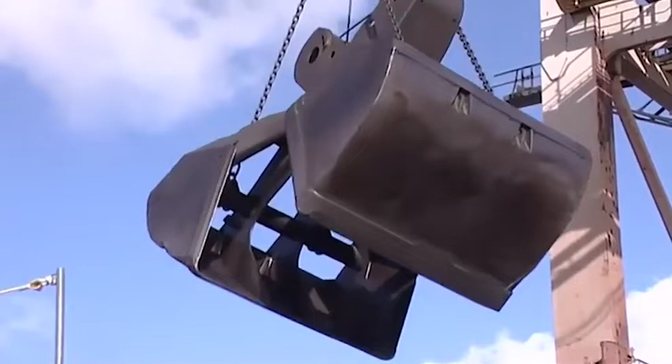As the worldwide demand for raw materials grows, faster turnarounds and an increase in terminal throughput have become commonplace. More than ever, seafarers working aboard bulk carriers need to rely on their training and professionalism in order to deal with these pressures whilst remaining safe when working.

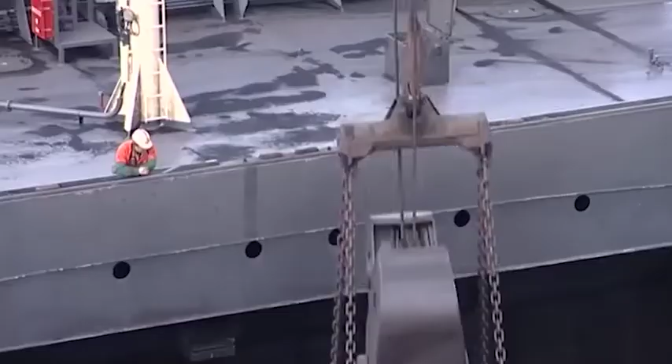Before any crew member starts working on a vessel, they'll undergo a familiarization program to become aware of the working practices and safety procedures.

Safety, however, does not stop there. The sheer size of a large bulk carrier can give the impression of great strength, but that strength can be severely weakened by unseen forces—forces powerful enough to endanger the ship and its crew. So safety aboard a bulk carrier also depends on an understanding of the vessel itself and the effect that these forces have on the ship's structure.

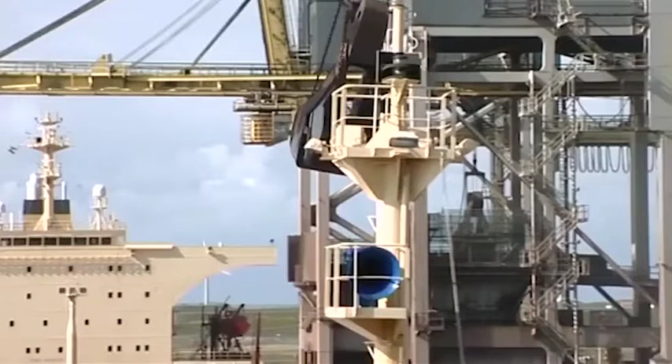And if the vessel is handled with care, then the vessel will care for its crew.

During the 80s and 90s, there were a considerable number of bulk carrier losses. In some instances, there was enough time for the crew to abandon ship, but in many cases, vessels sank with little or no warning. A number of these losses were attributed to structural damage, leading to catastrophic failure.

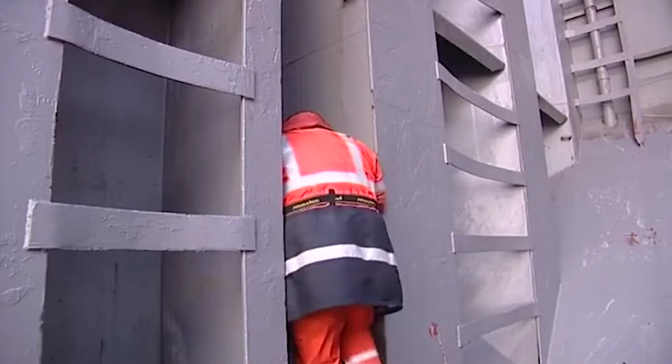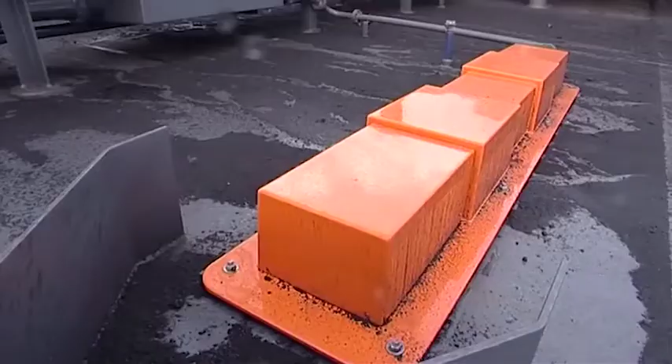After these incidents, both the International Maritime Organization and the International Association of Classification Societies carried out major research into many of the known and suspected structural failures among bulk carriers. The knowledge gained has led to ongoing improvements in vessel construction and inspection, along with new technology that enhances operational safety.

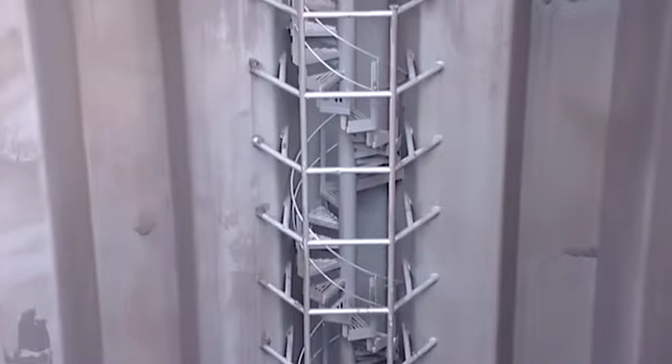For example, under the International Convention for the Safety of Life at Sea, SOLAS, a specified safe means of access for survey and inspection is now a mandatory requirement. This aids the early detection of structural defects.

And specialized training for port state control inspectors means independent inspection of a vessel's structure is more stringent than ever.

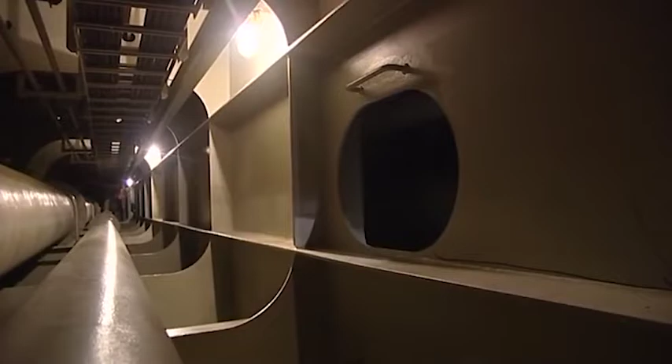The installation of high-level water alarms and monitoring systems in cargo holds, ballast tanks, and dry spaces forward of the collision bulkhead is also a mandatory requirement. High-level alarms and water ingress detection systems, commonly known as WIDS, quickly alert watchkeepers to potential flooding. These allow ship's personnel to initiate an appropriate response in good time.

Further requirements include immersion suits to be carried on all ships, and since 2006, the provision of free-fall lifeboats to be fitted on all new bulk carriers.

But despite these improvements in design, condition monitoring, and safety equipment, bulk carrier crews still need to manage and be aware of the operational risks.

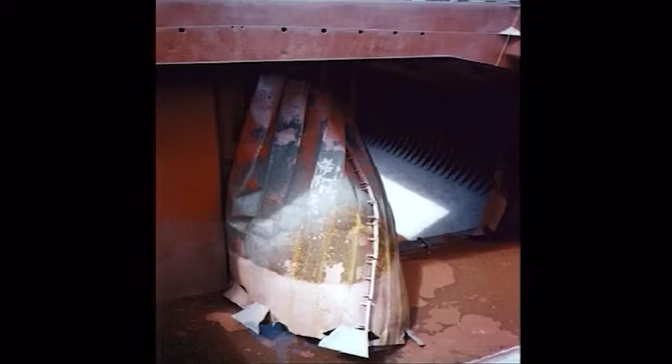Any bulk carrier can be vulnerable to catastrophic failure if not operated within its design limits, or if structural fatigue and damage is ignored.

And a ship whose structure fails can be lost in a matter of minutes, as the resulting ingress of water could quickly lead to irreversible flooding. The speed with which a bulk carrier and its cargo can sink should not be underestimated.

This highlights the necessity of water ingress detection systems. But of course, the most effective safety measure will always be the prevention of structural failure in the first place.

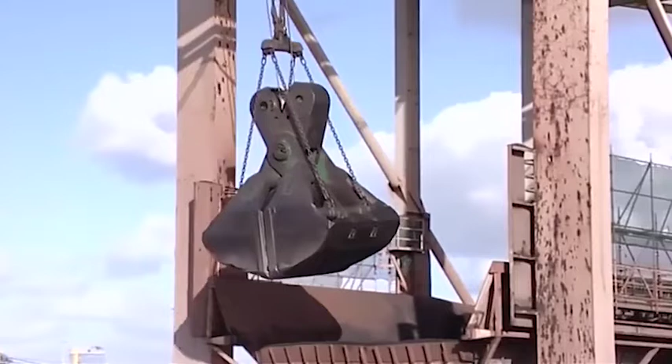The causes of structural failure, instability, or sudden water ingress are not necessarily due to poor design. In fact, the overall safety of a bulk carrier often depends on the degree of care taken by ship's crew and shore personnel during loading and discharge.

Structural failures and instability can often be triggered by three contributing factors.

Damage caused by equipment used during cargo operations.

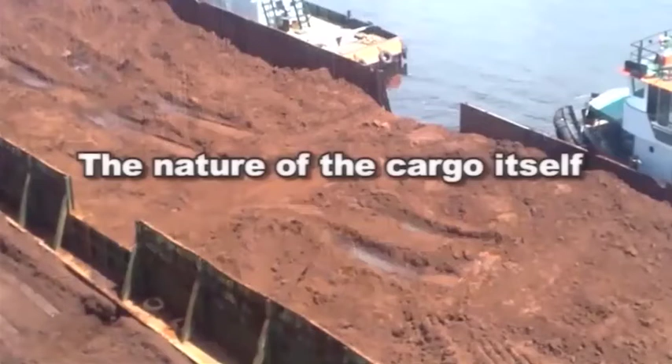The nature of the cargo itself, either causing corrosion to the hold structure or cargoes liable to shift or liquefy, leading to possible instability.

And mistakes or deviations from the agreed plan during loading and deballasting, causing stress to the ship beyond its design limits.

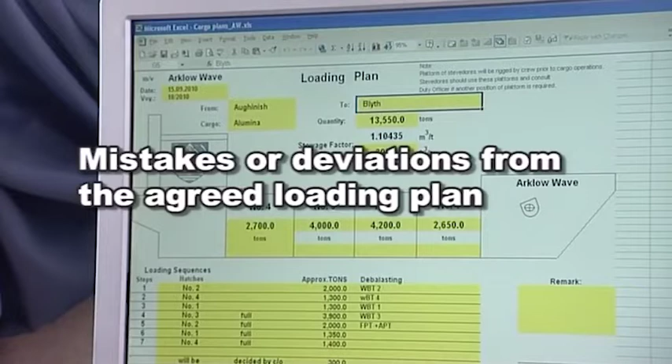Let's look at each of these points in more detail, starting with damage caused by equipment used during cargo operations.

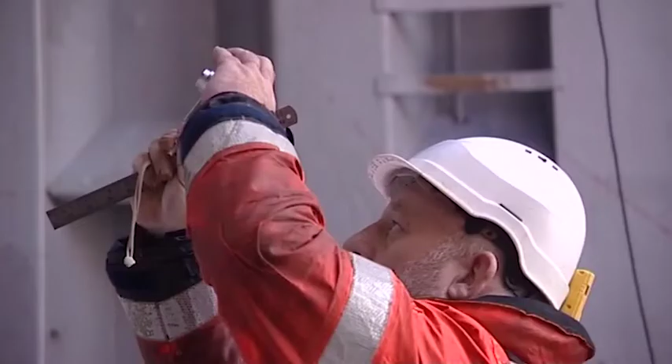Upon completion of discharge, the holds, hatch covers, and deck areas should always be inspected for any signs of damage. During discharge, the internal structures and coatings of the hold can be exposed to damage from grabs and from the hydraulic equipment often used to free and clear cargo residues.

The hold bottom and tank top plating can also sustain damage. Typically, this appears in the form of denting and can be the result of high-impact drops or pours during the loading of heavier cargoes.

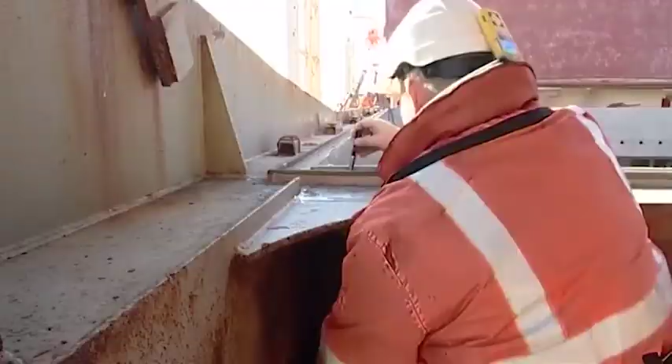On deck, the damage sustained from incidents during cargo operations can sometimes be more obvious. But the checking of coaming tops and smaller items, such as the correct functioning of hatch cover drainage channels, should not be overlooked.

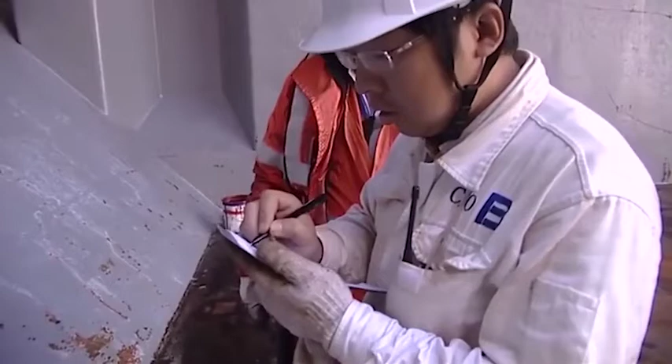Any findings should always be reported and recorded. If damage is discovered which may affect the integrity of the hull, the owners and classification society should be notified, as this could affect the vessel's insurance cover. Such incidents could also prevent a vessel from sailing until an approved repair has been made.

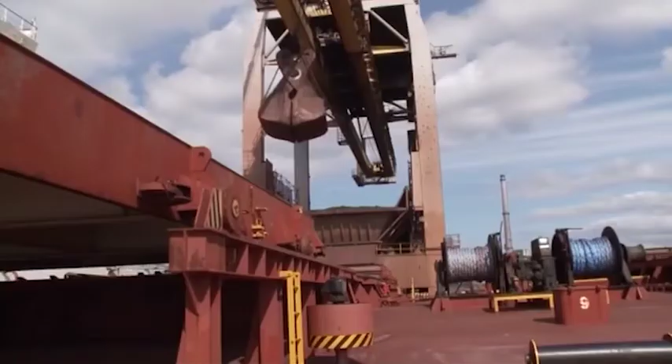Stevedore damage may contribute to a weakening of the ship's structure, but the nature of the cargo can also have a detrimental effect. For this reason, the condition of coatings and welds in the hold should also be noted.

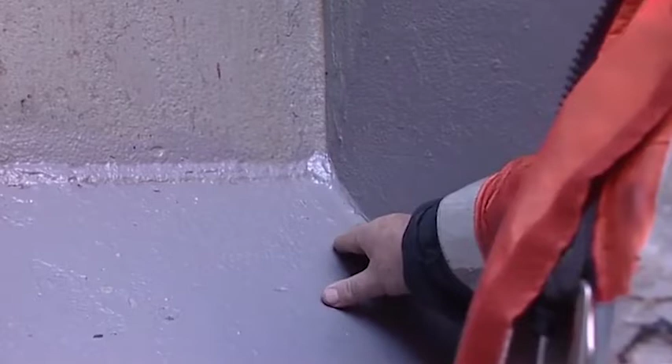Coatings are there to protect the steel from corrosion, either from the cargo itself or the environment. But many cargoes have corrosive or abrasive natures, which over time can damage this protection.

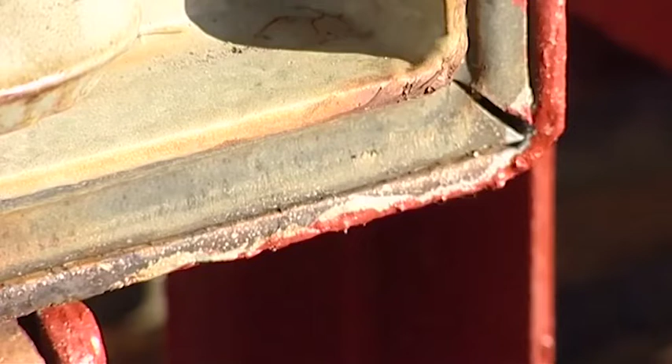The hatch covers, coamings, packing rubbers, and compression bars should always be examined for signs of corrosion or deterioration. However, other access points should also be inspected. In particular, the gaskets and securings fitted to manholes and inspection hatches should be checked to ensure they're structurally sound and weathertight.

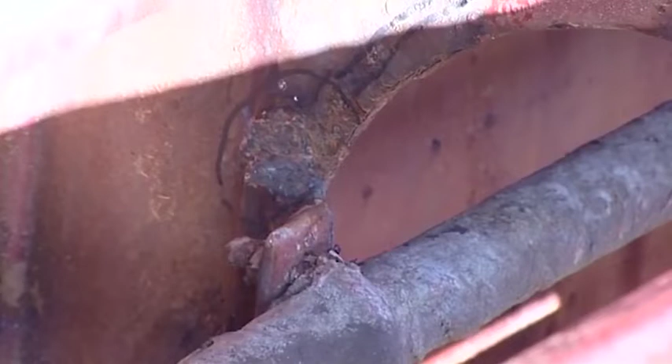Where the effect of corrosion is more severe, any wastage will need to be checked against class regulations and specified diminution limits, and repaired as necessary. Regular maintenance and the use of protective barrier coatings during the handling of certain cargoes will help to delay the long-term effects of corrosion.

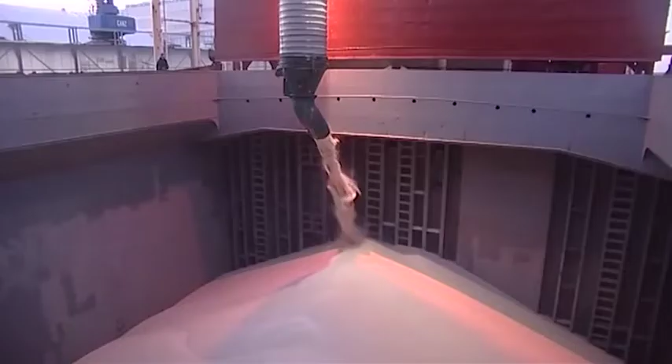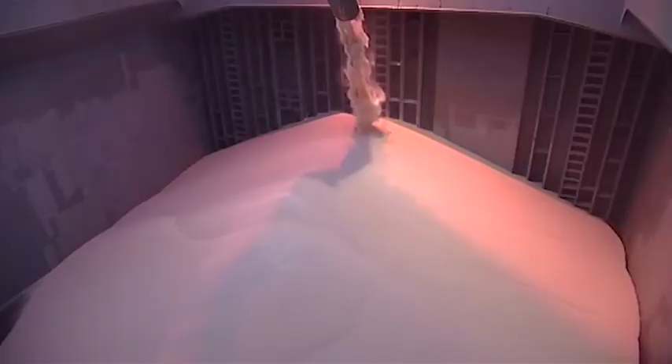But while some cargoes can cause corrosion, others have characteristics that can result in an adverse effect on stability. For example, during loading, free-flowing cargoes such as grains and fertilizers will require careful attention when trimming to reduce the risk of instability. And grain cargoes in particular are subject to national and international legislation governing stability.

But another less obvious risk affecting certain dry cargoes is liquefaction, causing the cargo to shift and the ship to become unstable. Liquefaction occurs if the moisture content of a cargo is too high. If stored in the open, for instance, a cargo could have become affected by recent weather conditions, such as rain or ice, potentially increasing the moisture content.

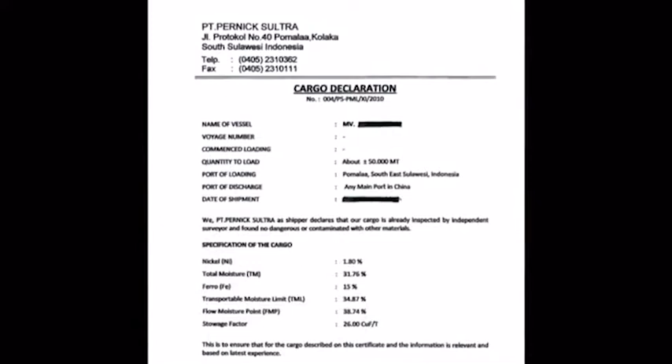Any commodity susceptible to this condition should have moisture content below the transportable moisture limit, or TML. This must be certified in the shipper's declaration, stating that the moisture content is within acceptable limits prior to loading.

Stevedore damage and the nature of the cargo may contribute to either structural failure or instability, but a further potential risk to the integrity of the ship is the consequence of mistakes made during the loading process.

The structure of a typical bulk carrier consists of a single-deck ship, fitted with topside tanks, a double bottom, hopper tanks, and side shells with vertical frames, corrugated bulkheads, and hatchways above. The holds are a series of large spaces separated by transverse bulkheads.

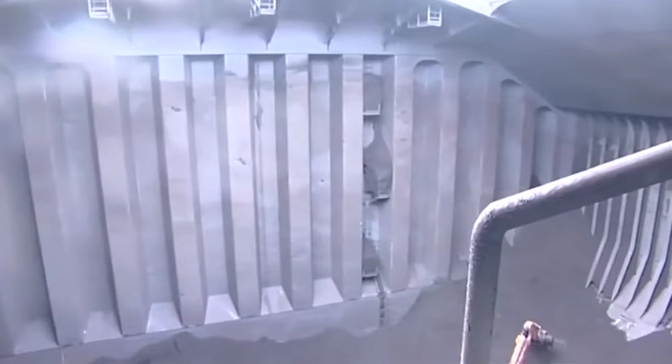Despite all this steelwork, the ship is not a rigid structure. In fact, for it to function effectively, there must be a degree of flexibility. However, overloading any one of the holds will cause excessive stress to the structure of the vessel. And if a cargo is poured into one end of a hold and piles up, the pressure acting on the transverse bulkhead will increase.

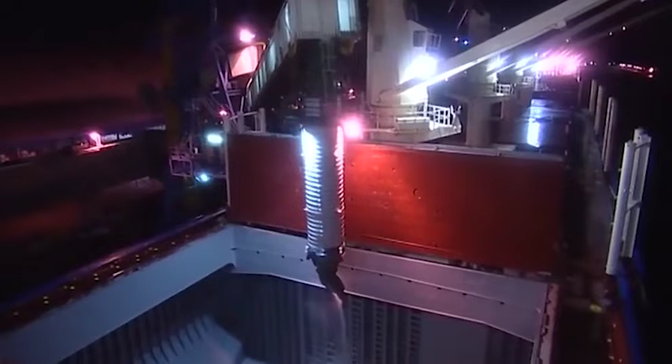Likewise, if cargo is unevenly distributed away from the vessel's center line, this will induce twisting and the subsequent warping of the hull structure, as well as placing stress on the transverse bulkheads. Therefore, the agreed loading sequence should be followed precisely, and cargo must always be stowed and trimmed appropriately within permissible limits.

Whilst at sea, there are further forces that act upon the hull, which must also be considered. A ship has its own weight, made up of its structure, machinery, crew, stores and effects. Adding to this, by filling and emptying the cargo holds and ballast tanks, will generate additional shear forces and bending moments.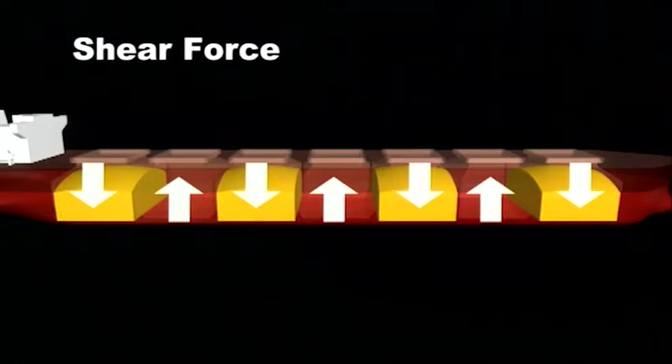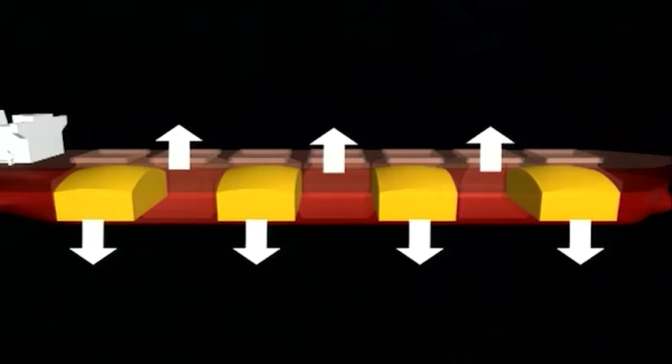Put simply, shear force is caused by two opposing forces acting against each other. There is a downward vertical force, which comes from the weight of the hull and cargo, and an opposing upward action, which is the buoyancy of the vessel. Shear forces occur when these forces are not in balance at every point along the length of the ship.

A bending moment is a force that bends the vessel along its length. If weight is concentrated in the middle of the ship, bending of the structure will cause sagging. And if weight is concentrated at opposite ends of the ship, this will result in hogging.

At sea, the ship is subjected to a continuous cycle of varying forces and changing wave pressure acting on the hull. If handled with care, the ship's structure is designed to withstand maximum permissible shear forces and bending moments.

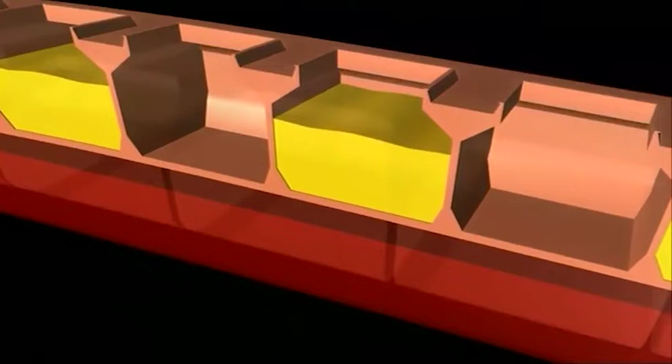Shear force and bending moment calculations should always be prepared prior to any cargo handling or ballast water operation. The calculations must be accurate, because if the maximum permissible limits are exceeded, the ship could be at risk of structural failure.

Handling a bulk carrier with care requires understanding and the full cooperation and expertise of both ship's crew and shore personnel. Both parties have a number of tools at their disposal, which assist with the correct loading, stowage, and discharge of cargo.

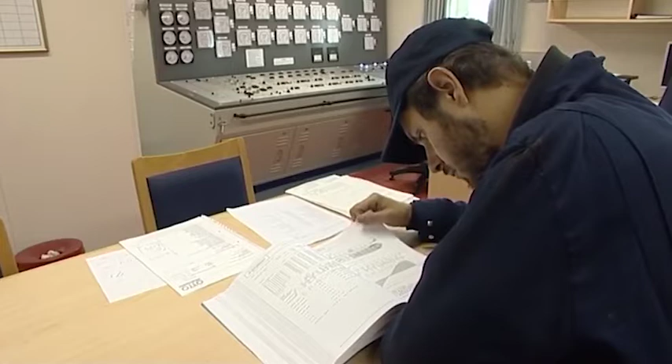Aboard ship, there should be an approved loading manual. This must give the ship's designed cargo loading conditions and distribution, as well as stating the maximum permissible shear force and bending moment limits. These limits are set for both harbour conditions, when the vessel is in port, and at sea conditions, which take into account the additional stresses of the ship moving in a seaway.

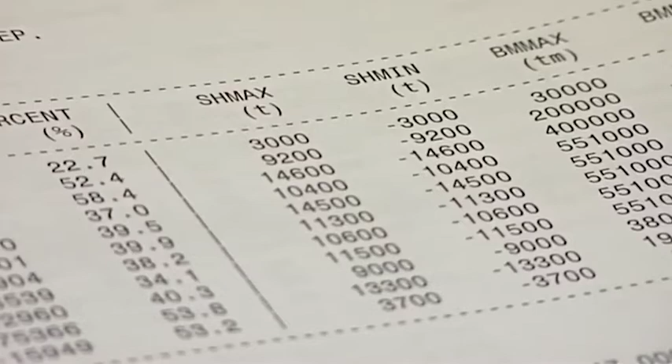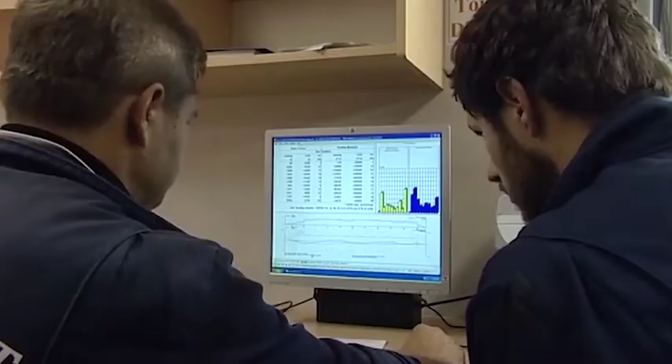The ship should also be equipped with a designated class-approved loading computer and appropriate software. As these systems vary, ship's officers must be familiar with and competent in the use of the equipment specific to the vessel.

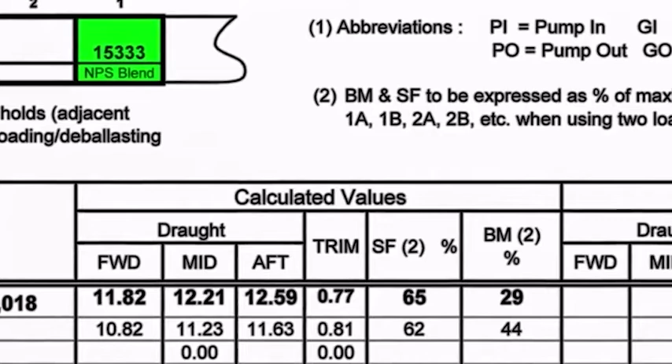Ship's officers also need to be capable of producing an accurate loading or discharge plan. This must take into account ballast water management and stability, as well as the vessel's shear force and bending moments at each stage of any loading or discharge sequence. The calculations must observe the permissible harbour and at sea limits.

And if plans deviate for whatever reason, the figures must be recalculated before acceptance. Aboard some vessels, hull stress monitoring systems are fitted.

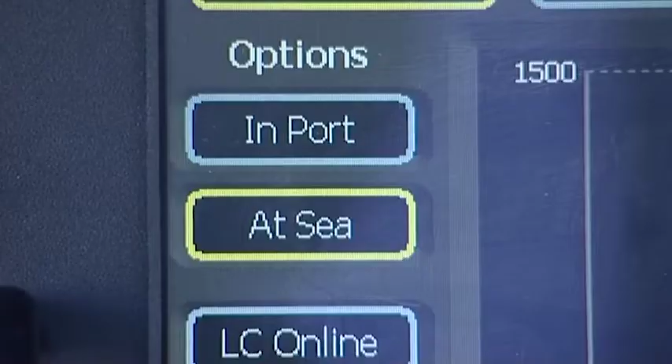These can provide ship's officers with real-time indications of the effects of shear force and bending moments, both at sea and in port. As they're often linked to the loading computer, they can highlight any deviations from the loading plan or the maximum permitted stress limits, allowing corrective action to be taken.

There are also mandatory regulations and guidance in the form of two codebooks, which must be aboard every bulk carrier. The International Maritime Solid Bulk Cargoes Code, the IMSBC code, is designed to help ship's crew identify and correctly handle certain cargoes that could present a hazard, such as liquefaction or chemical reaction.

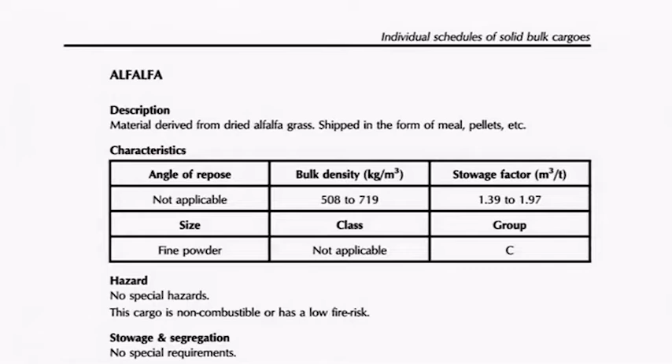The individual schedules not only describe the particular characteristics of these cargoes, they also provide general reference information relating to bulk densities, stowage factors, and trimming procedures.

The Code of Practice for the Safe Loading and Unloading of Bulk Carriers, or Blue Code, is found in the supplement section of the IMSBC Code. The Blue Code provides guidance to ship's masters and terminal operators on the safe handling, loading, and unloading of solid bulk cargoes.

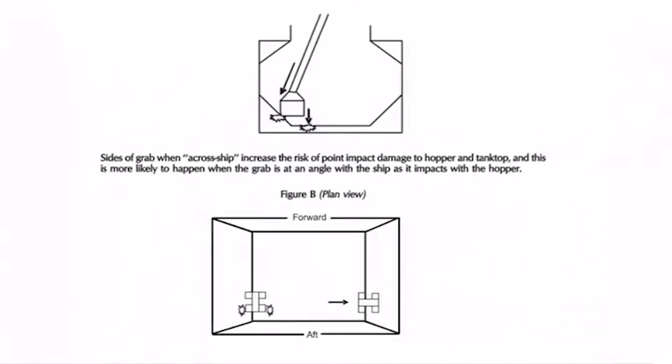Ashore, the Blue Manual supplements the Blue Code and provides further detailed guidance for terminal operators. By referring to these codes, and by understanding bulk carrier design and operating limits, both the ship's crew and shore personnel become key partners for the safety of the vessel. And as with any successful partnership, establishing good, clear communication early in the relationship is vital.

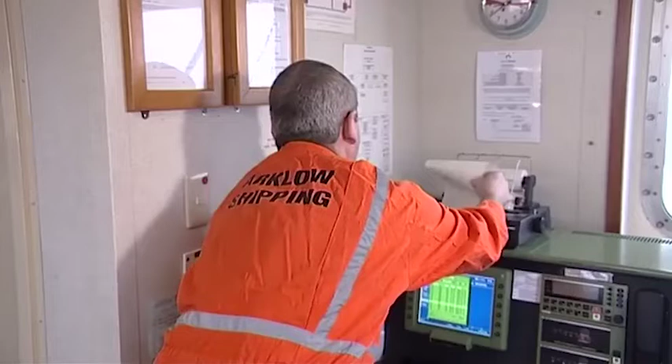Once a charter or commercial voyage has been fixed, it's important that the ship is provided with preliminary information about the prospective cargo and terminal, so that loading or unloading can be planned.

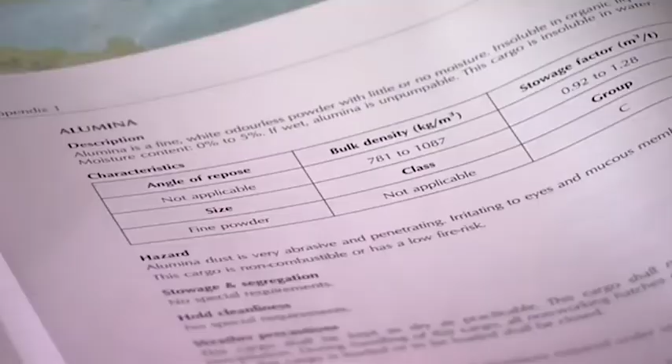If applicable, this information will be checked against the IMSBC code, so that ship's officers are fully aware of the properties or handling requirements of the intended cargo. The loading plan should also take into account the requirements of the IMSBC code, as this may have a bearing on stowage and segregation.

But in all cases, the preliminary shipping information must be received in sufficient time to allow an accurate loading or discharge plan to be produced. Likewise, terminal staff will require information about the ship in order for them to put in place their own preparations for cargo handling.

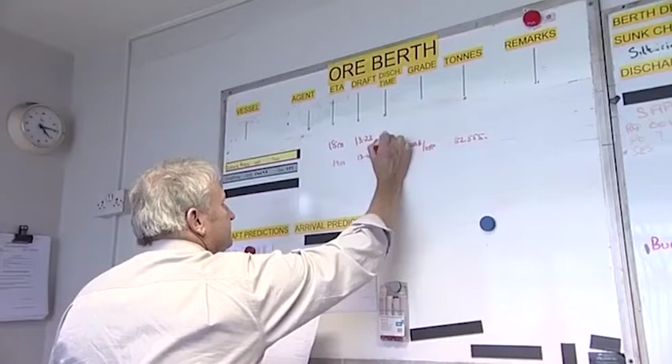Therefore, a two-way information exchange between ship and shore must take place prior to arrival. This is to ensure the upcoming cargo operations are conducted safely and within the operational limits of both vessel and terminal.

This information exchange should be laid out as specified by the Blue Code and must be clear, understood, and agreed by both parties. As early as possible, the master should provide the ship's ETA and particulars, details of any ballasting or deballasting requirements, along with a preliminary loading or discharge plan.

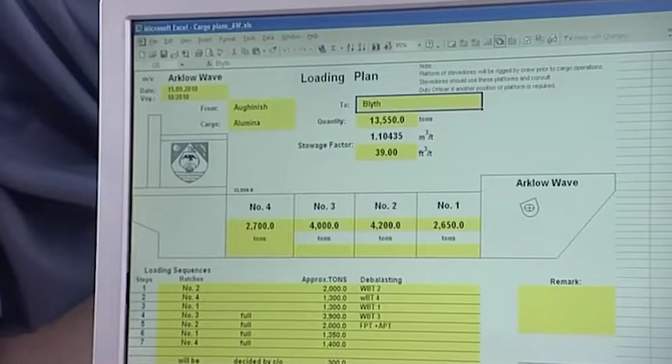This plan should be prepared in a form such as that laid out in Appendix 2 of the Blue Code. Amongst other items, it should include the quantity of cargo and the number and order in which holds are to be worked.

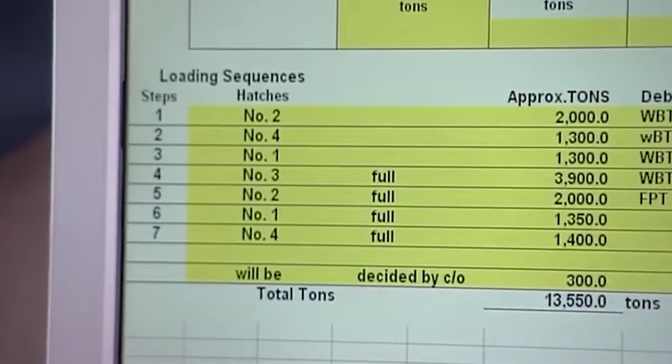The ship should also provide details of its mooring and gangway arrangements, as well as confirming that holds into which cargo is to be loaded are clean and free from previous cargo residues.

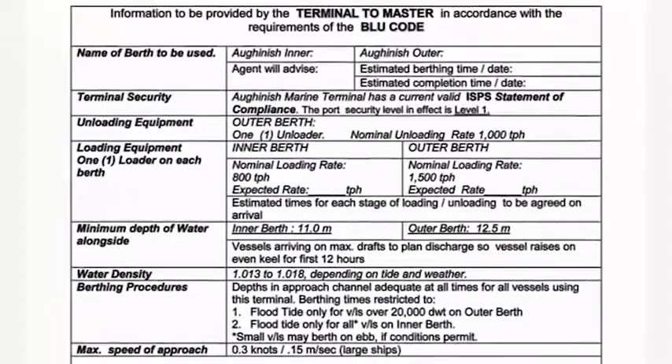For its part, the terminal should provide information such as the name and availability of the berth, the estimated times for berthing, the estimated times for the completion of loading or discharge, any characteristics of the cargo handling equipment, expected loading or unloading rates, and the name and contact details of the nominated terminal representative.

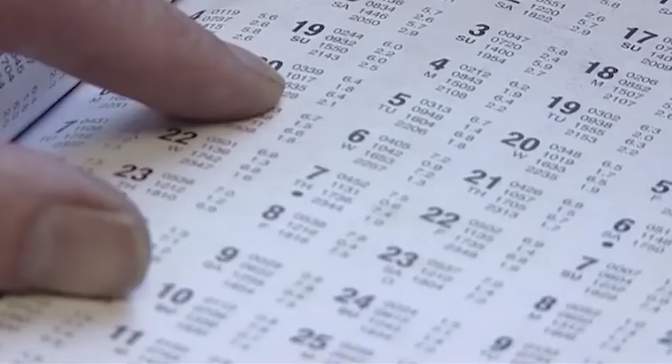Further factors to consider are the minimum depth of water alongside, berthing arrangements, and the availability of tugs. Any information given by the terminal relating to tides, the water depth at the approach and departure channels, as well as the water depth at the berth, must be accurate and complete to assist safe navigation.

The ship's arrival condition and maneuverability should always be considered. For example, a lightly ballasted ship can become vulnerable during navigation, as both rudder and propeller efficiencies are reduced, and the windage is increased. In these circumstances, the ship's ability to maneuver safely is reduced, particularly in high winds and strong currents. And with restricted vessel handling, the chances of navigational error, collision, or grounding increase.

It's vital that any proposed arrival or departure drafts, as well as any restrictions or time requirements relating to deballasting operations, are checked and agreed by both parties. Any conditions applied must always take into account the capabilities and safe working limits of both the ship and terminal.

We have 15.5 meters, okay? Depth. Yeah.

Once alongside, the terminal's nominated representative and the master, or chief officer, must conduct a meeting before starting cargo operations. At this point, the final cargo plan is discussed and approved, and a joint ship-shore checklist completed and countersigned by both parties.

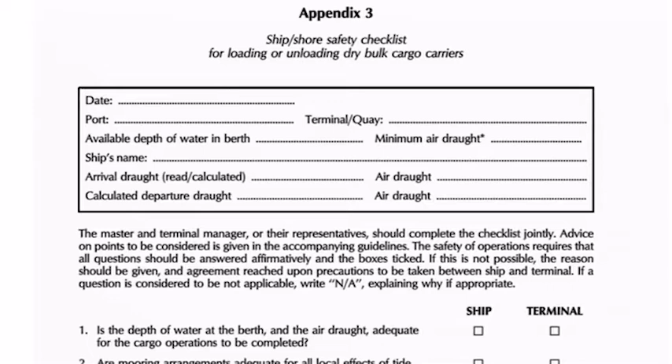Amongst other items, this checklist will consider that an agreed system of communication along with designated liaison contacts aboard and ashore has been established. Any restrictions on taking bunkers have been put in place, and that the atmosphere is safe in the holds that may require access.

Check, too, that the shipper has provided the information on the properties of the cargo, and that any testing certification relating to cargo characteristics is complete and accurate.

Masters are ultimately responsible at all times for the safe loading and unloading of the ship. This includes controlling the safe and efficient synchronization of cargo operations and ballast water operations.

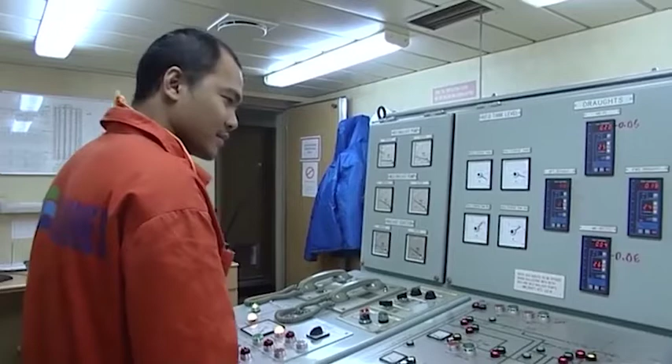Both the terminal and ship should ensure the sequence of holds to be worked has been clearly identified and agreed, with a maximum rate of 1,000 per hour.

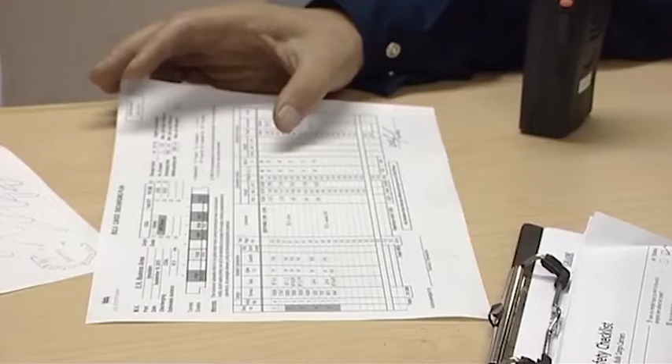The ship must ensure the cargo loading or discharge plan has been calculated for all stages of the operation, including at times of ballasting or deballasting. For this reason, it's imperative that the loading or discharge plan has been agreed and countersigned by both the ship and the terminal, and that communication and agreement is maintained at all times.

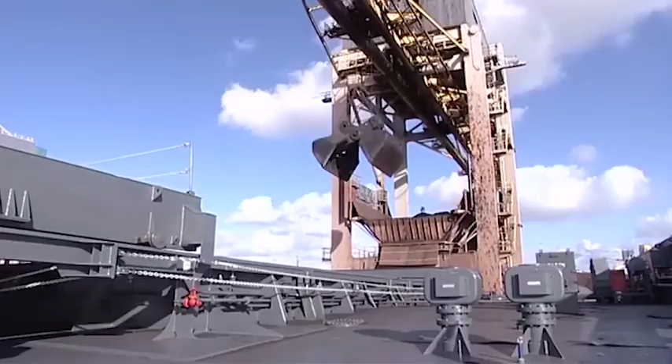If ship's officers are not satisfied with the cargo handling activity, or there is a sudden deviation from the agreed plan, the master should be informed immediately.

By that time we already need to sail out, so they're asking is that okay for us.

The master must stop the loading or discharge if the cargo distribution could adversely affect either the stability or the stresses on the ship's structure.

Cargo distribution along the ship's length has a direct influence on the bending moments and shear forces. Evenly distributed cargo in all holds is usually adopted for low-density cargoes, such as coal and grain. This is called homogeneous loading.

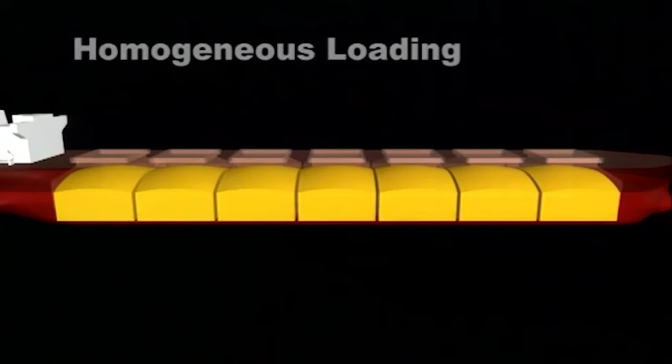Large bulk carriers sometimes stow high-density cargoes, such as mineral ores, in every other hold. This is called alternate loading.

When high-density cargoes are stowed in this manner, the weight of the cargo in each hold is approximately double that carried in a homogeneous load distribution. As a result, this requires a vessel to be strengthened and classified for this loading configuration. Under SOLAS, vessels over 150 meters and more than 10 years old are forbidden to use alternate loading unless certain conditions are met.

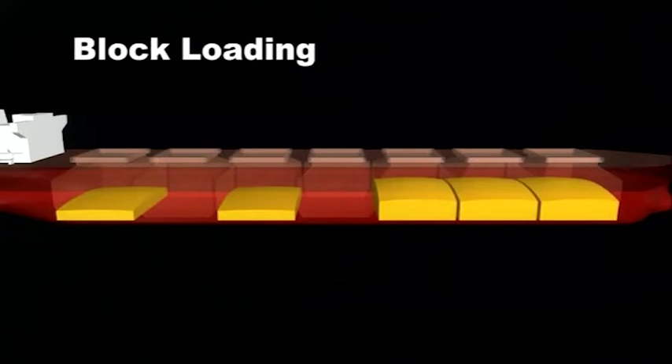Block loading is where cargo is loaded in two or more adjacent holds, with neighboring holds remaining empty. This method is often adopted when the ship is part loaded or carrying more than one commodity.

It requires approved conditions as specified in the loading manual. And to avoid overstressing the hull structure, careful consideration should be given to the amount of cargo loaded in each hold and to the sailing draft.

Regardless of loading method, at all times the hull stresses should be kept below permissible limits. Loading rates and deballasting rates must be monitored throughout to ensure that the ship's structure is not overstressed and that shear force and bending moment limits are not exceeded.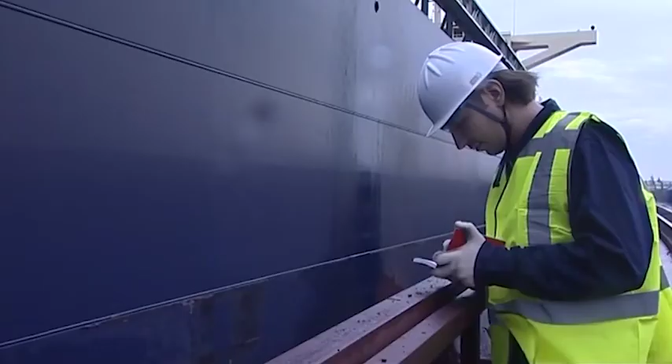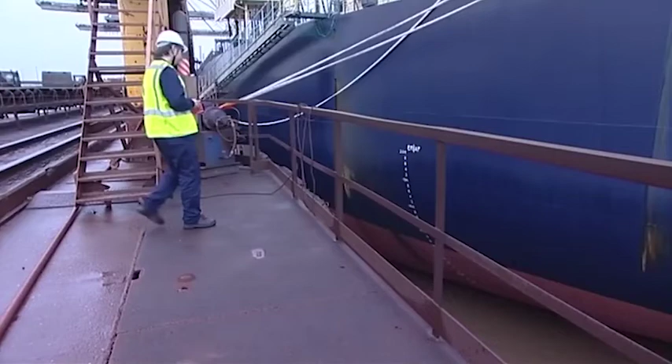It's crucial, therefore, to monitor the ship's condition closely during cargo operations. Ship's personnel must carry out draft surveys at regular intervals to check the calculated ship's loading condition, the cargo weight, and its distribution. The recorded readings should be checked against the loading plan. This information, together with loading rates, ballast synchronization, stress and displacement calculations, all help to balance the forces acting on the hull.

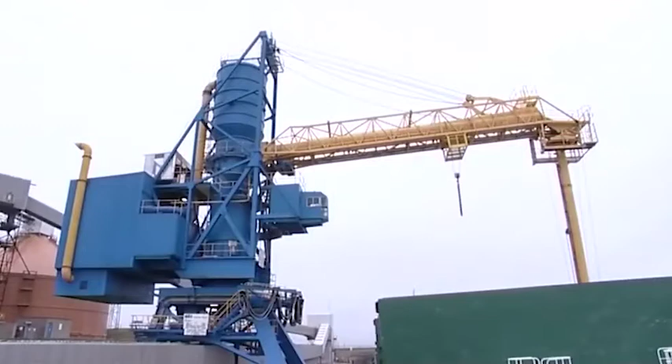Officers on watch during cargo operations must ensure terminal staff follow the agreed plan. If there is any deviation for whatever reason, corrective action should be taken. If necessary, cargo operations should be stopped and the plan modified, ensuring that the stress and operational limits of the ship are not exceeded.

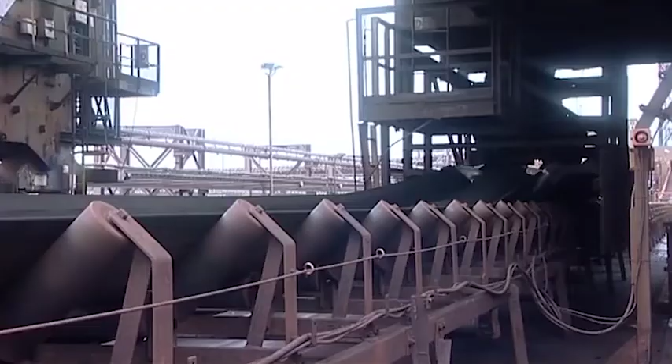For example, conveyor belts offer a very efficient method of loading, with rates varying between 1,000 and 16,000 tons per hour, and in some ports, rates can even go higher. This stretches the efficiency of the ship's ballast water system, making the synchronization between deballasting and loading difficult.

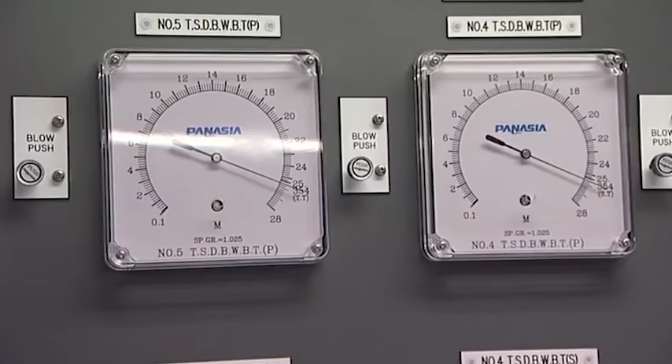In these circumstances, the ship and the terminal should agree that if deballasting becomes out of step with cargo operations, loading should be suspended until the deballasting operation has caught up.

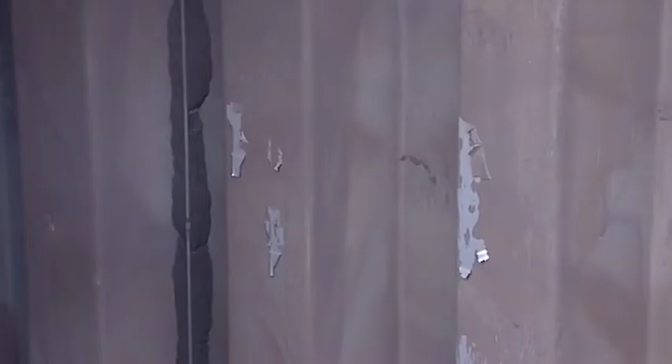During both loading and discharge, mechanical equipment may also damage the ship's structure. Whilst discharging, the use of grabs or hydraulic excavators can cause damage to the hold structure or its protective coatings. And during loading, it is the terminal's responsibility to alert the master to any individual grab loads or pours that are large or heavy, where there could be the risk of a high-impact drop.

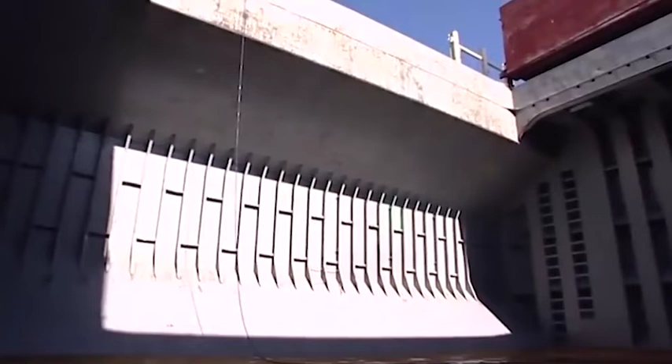These could potentially damage hopper sides and tank top structures, or stress the ship's hull. For this reason, particular care should be taken at the start of any loading operation into empty holds, especially when loading steel and scrap metal cargoes.

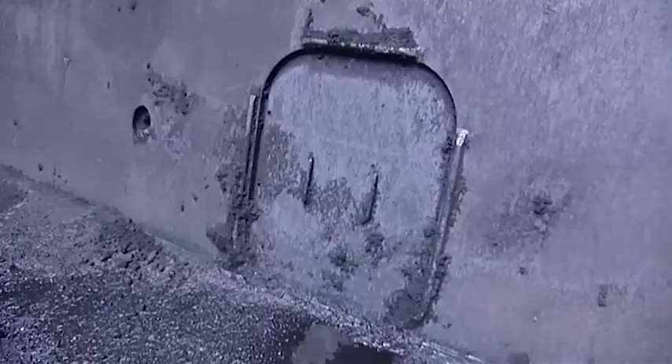Officers and crew members should be on the lookout for damage during cargo operations at all times. Manhole covers or gratings for bilge wells should be checked that they're present and intact. And any damage to the ship's structure caused by terminal handling equipment must be reported immediately. Guidance on damage reporting procedures is contained in the BLU Manual, Annex 3. But many companies will also have their own procedures.

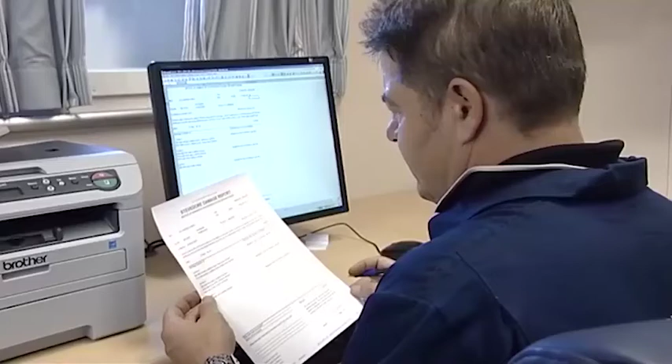Loading equipment and conveyor designs vary. The time it takes to halt the operation must be taken into account to avoid overloading the ship. During the last stages of loading, the master should advise the terminal when final trimming has to begin in order to allow time for conveyor runoff.

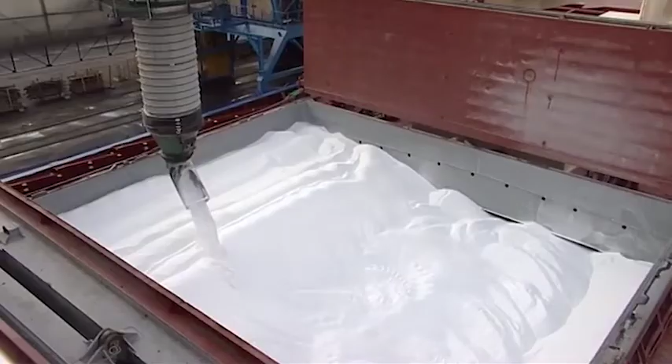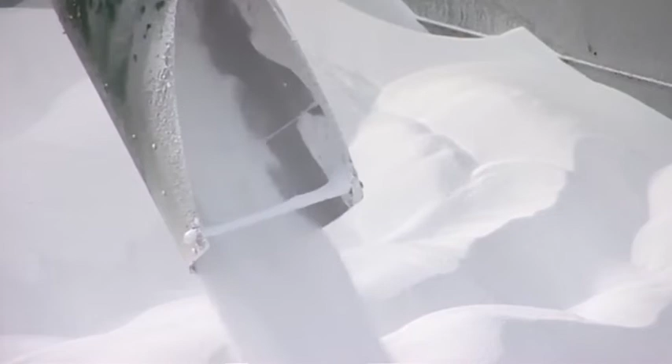Trimming requires close supervision, and where applicable, it should be carried out in accordance with the requirements of the IMSBC code. For instance, some cargoes have a specific angle of repose. This is of significance with free-flowing, non-cohesive cargoes, liable to shift if not correctly distributed.

In the case of discharge, the terminal representative should advise the master when unloading is considered as completed from each hold. And close supervision should be kept on the final stages of the unloading operation to ensure that all cargo has been discharged and holds cleaned as appropriate.

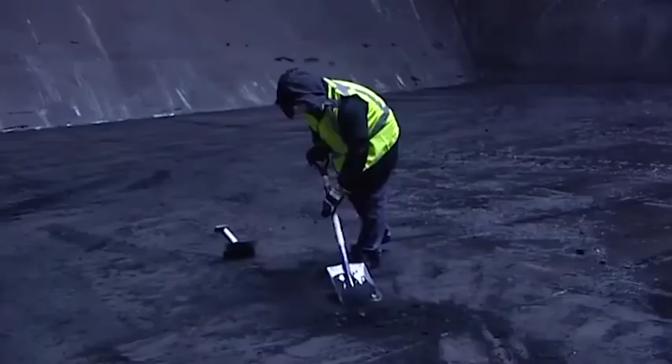On completion of any cargo operations, the master and terminal representative should agree in writing that the ship has been loaded or discharged in accordance with the plan, including any agreed variations. Any damage that has occurred should also be recorded and noted by both parties.

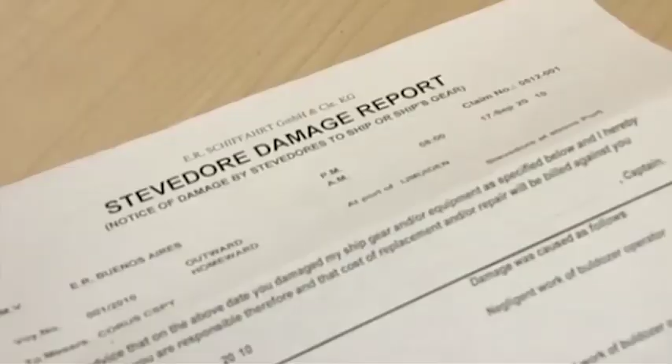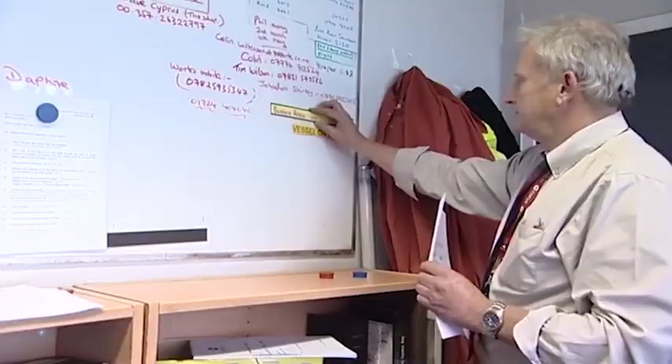As terminals seek to maximize throughput and load vessels ever more quickly, the chances are that more mistakes will be made. The safety of a bulk carrier is in the hands of many individuals, both aboard ship and ashore. But the stresses and pressures are not just felt by the people involved. The very ship itself can also suffer from stress and fatigue. And just like people, bulk carriers need to be handled with care and respect.